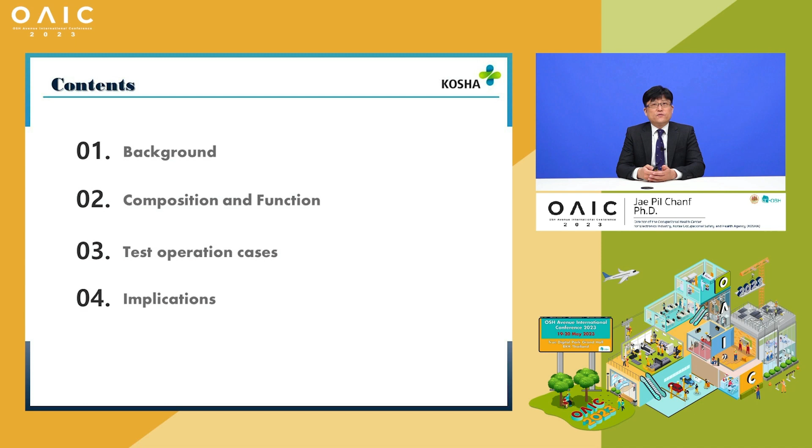Though we still have a long way to go, I'm going to share with you the constant chemicals monitoring system. This system has been under development since 2020 and is now in test operation. The order of presentation is as follows: background, composition and function, test operation cases, and implications.

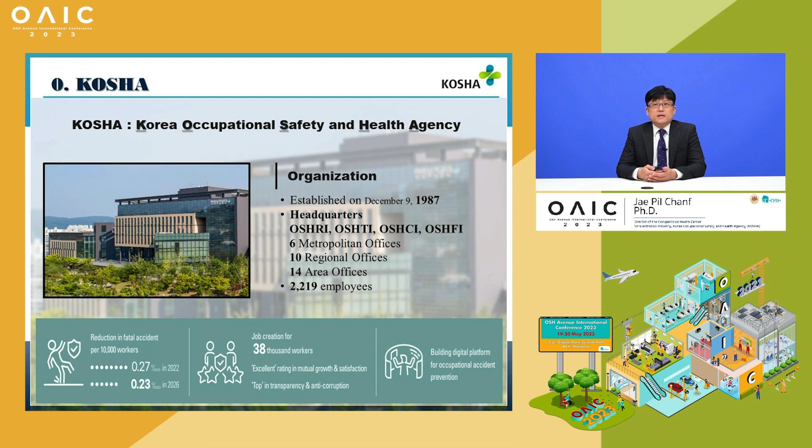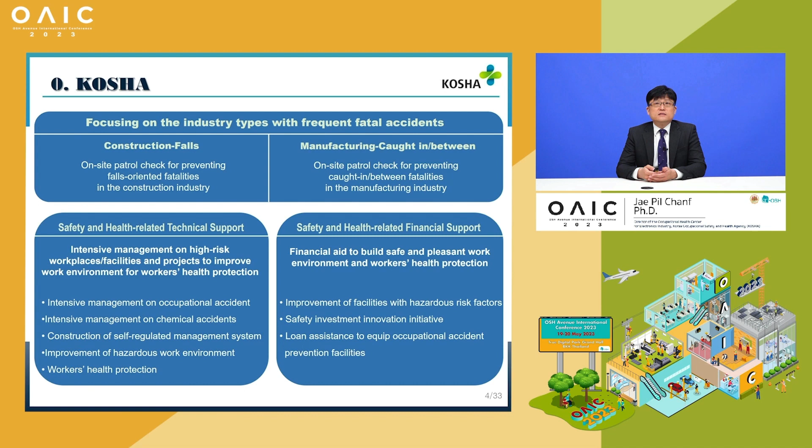Before I move on to the main discussion, I'd like to briefly introduce KOSHA. KOSHA means Korea Occupational Safety and Health Agency. KOSHA was established in 1987 and is composed of headquarters, 4 institutes, and several area offices. We especially focus on the industry types with frequent fatal accidents, carrying out patrol inspections to prevent falls in construction and caught in or caught between injuries at manufacturing sites.

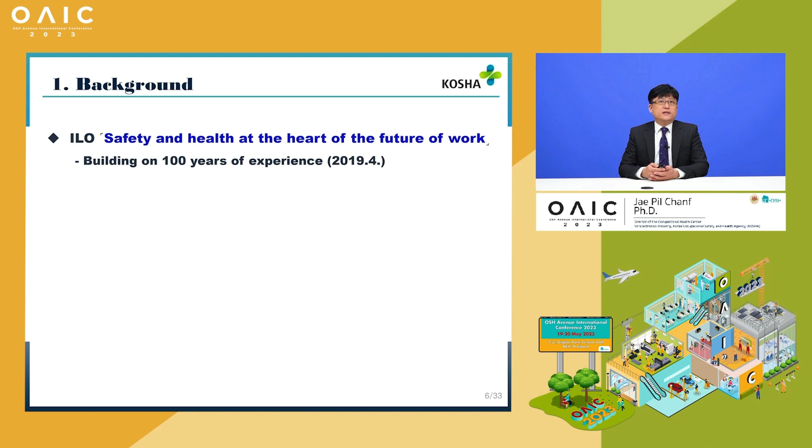Now, let me begin with the background. The Safety and Health at the Heart of the Future of Work report, published in 2019 by ILO, discusses technology, demographics, sustainable development, and changes in work organization. These changes are seen as the future challenges and opportunities of OSH.

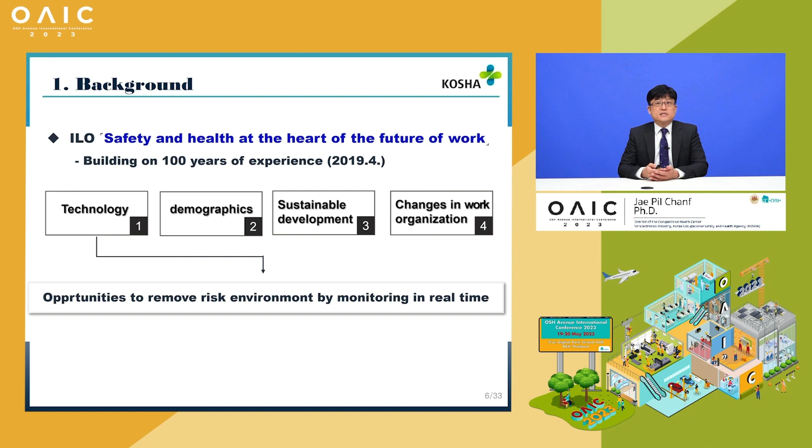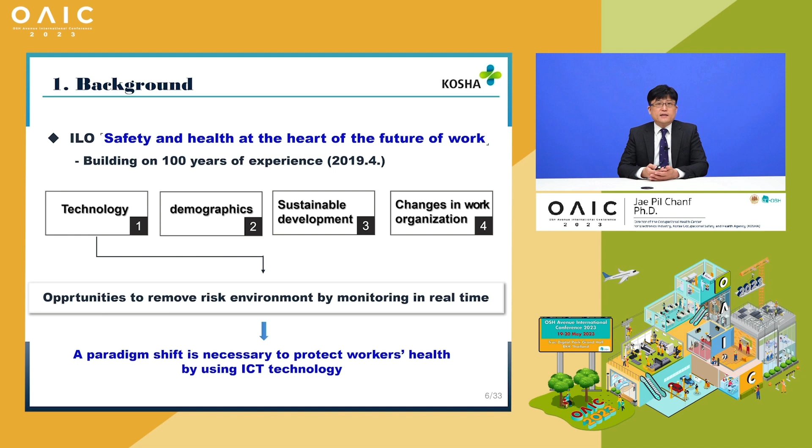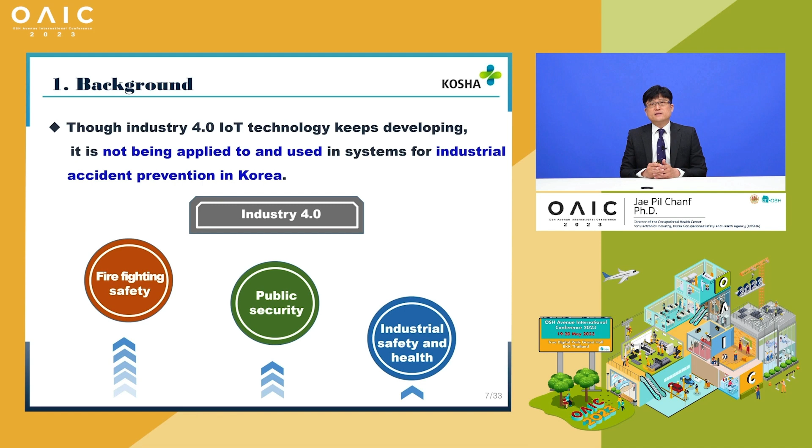The report says digitalization and ICT technology development can provide opportunities to remove risk environments by monitoring exposure to risk in real time. Therefore, a paradigm shift is necessary to protect workers' health by using ICT technology. Though Industry 4.0 technology keeps developing, it is not being applied to systems for industrial accident prevention in Korea. While these technologies are being actively used in other areas of safety, such as firefighting safety and public security, OSH is applied with just conventional technical guidance and facility and equipment improvement.

As a result, cases of acute chemical poisoning are increasing in Korea. Most cases have occurred during non-routine work, temporary or short-time cleaning work. For example, there was a death caused by acute poisoning with dichloromethane last year. Also, a person died while cleaning inside a TCE washing tank in 2019.

Although Korea has devised a work environment measurement framework and provided technical guidance to prevent such acute poisoning accidents, these measures are not enough to prevent accidents caused by non-routine work. That is because the work environment is measured semi-annually, and the technical guidance is given just as a one-time visit for technical support. In addition, business owners have a complacent mindset that there is no problem as long as they comply with the basic law, and this results in a lack of motivation to improve the work environment.

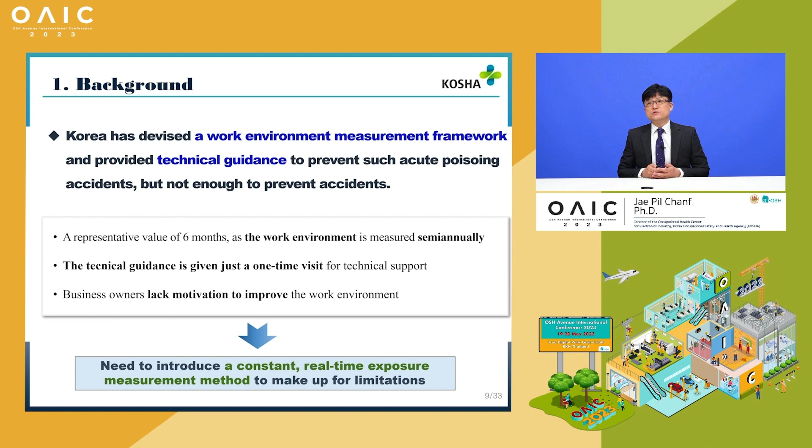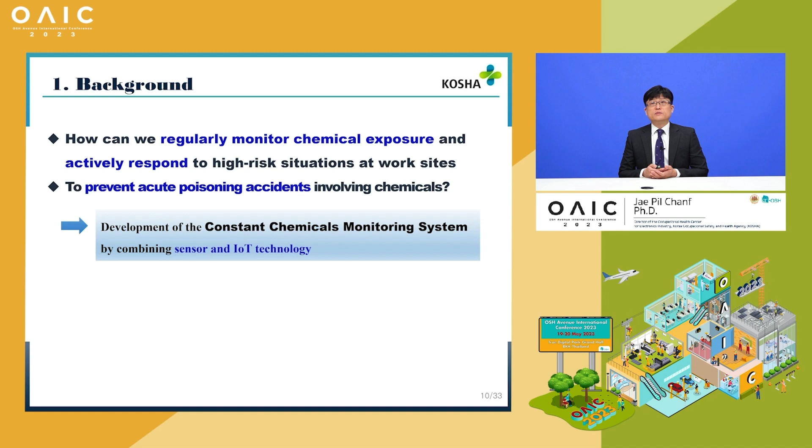So, I need to introduce a constant real-time exposure measurement method to make up for these limitations. How can you regularly monitor chemical exposure and actively respond to high-risk situations at work sites to prevent acute poisoning accidents involving chemicals? To make up for such limitations, we have developed the constant chemicals monitoring system with a combination of sensor and IoT technology.

The constant chemicals monitoring system is developed to regularly monitor the exposure concentration of chemicals by installing IoT-based remote sensors at business establishments that handle chemicals, enabling the businesses to control the work environment by itself by analyzing and using the data on the monitoring platform.

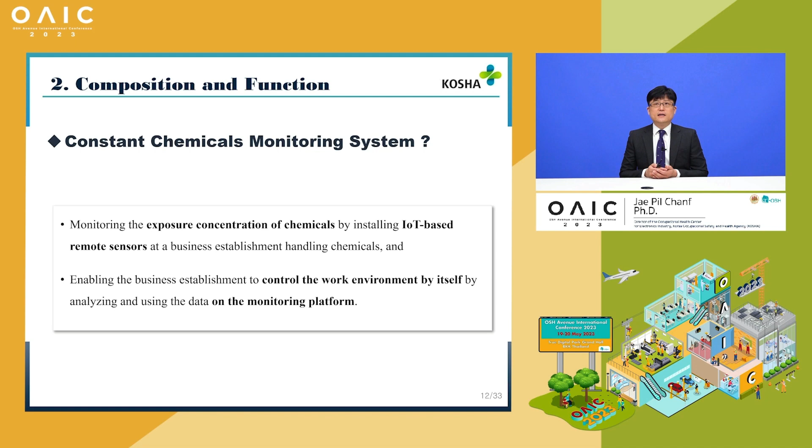I would like to show you an animation video to help you better understand the monitoring system. The slide shows the flow chart of the system. Step 1: with the sensors installed at the business sites, the measured data is transmitted to a monitoring platform where workers or managers can check the exposure concentration of chemicals in real time.

Step 2: when the exposure goes above a certain level, an alarm is triggered in the sensor and an SMS notification is sent to registered mobile phones. Step 3: with this system, businesses can check the performance of ventilators and improve the work environment to prevent occupational disease. Also, if a business submits an application to KOSHA, we provide support with consulting services and funds for work environment improvement.

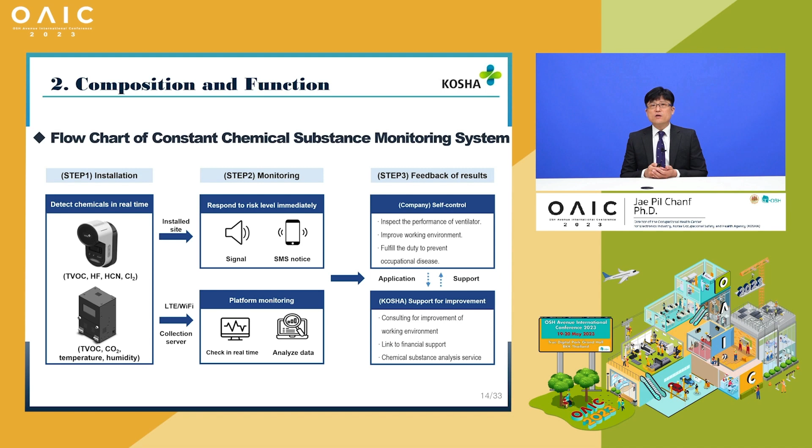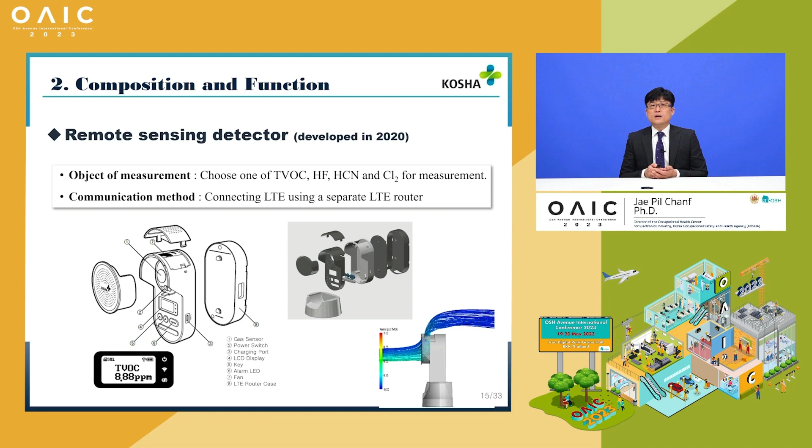The remote sensors were developed in 2020 to measure TVOC, hydrogen fluoride, hydrogen cyanide, and chlorine gas respectively. In other words, you can use a sensor with a TVOC detector if you want to measure TVOC. A separate LTE router is attached to the sensor for communication.

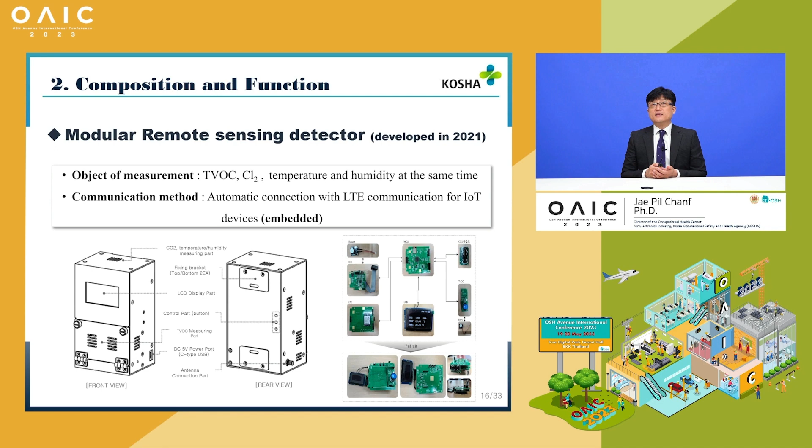The remote sensor developed in 2021 supplemented what fell short of the 2020 version. The new sensors are modular and can be attached to and detached from the device. This allows TVOC, carbon dioxide, temperature, and humidity to be measured at the same time. Communication parts were also upgraded with an LTE router embedded for automatic connection.

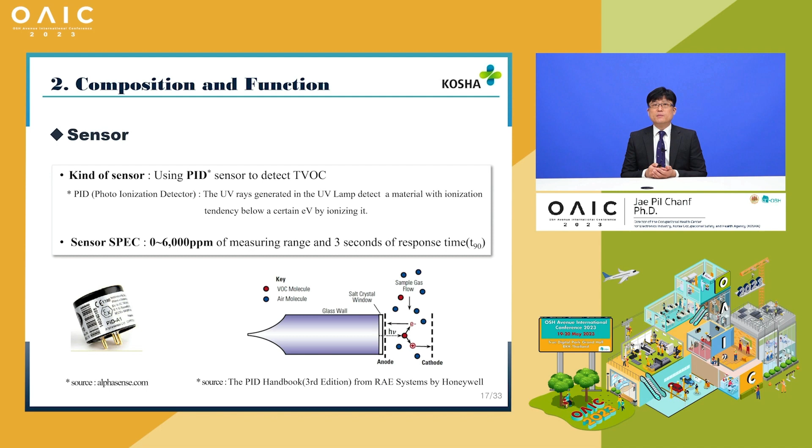A PID sensor is used for the device, as it was found to be the most appropriate to detect TVOC according to our research. The PID sensor uses the principle that UV rays generated in the UV lamp detect a material with an ionization tendency if it is below a certain electron volt. Its measuring range is 0 to 6,000 ppm and its response time is 3 seconds. The picture on the left is a PID sensor.

The concentration value of certain chemicals can be estimated by multiplying its response factor (RF), provided by the sensor manufacturer, and the TVOC value detected by the PID sensor. For instance, when calculating the exposure concentration of TCE, if the TVOC value detected by the sensor is 10 ppm, it is multiplied by 0.6, the TCE's RF, to estimate the TCE's exposure concentration to be 6 ppm.

The standard for the alerting signal was set on the basis of the ceiling value provided by ACGIH. If a chemical doesn't have a ceiling value, it is set on the basis of a value 5 times the TWA.

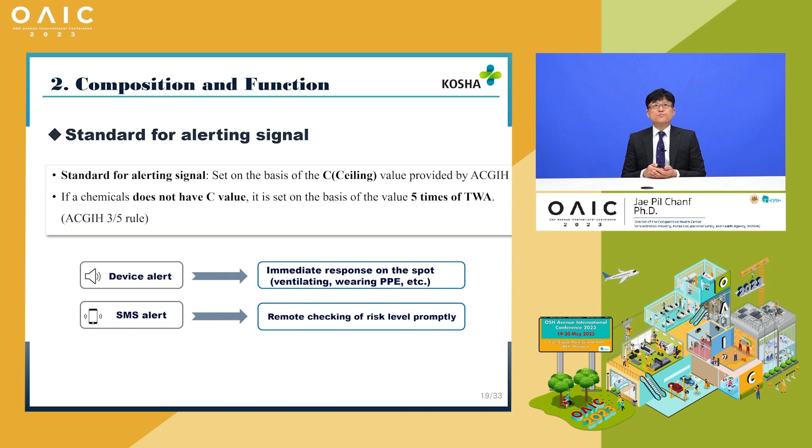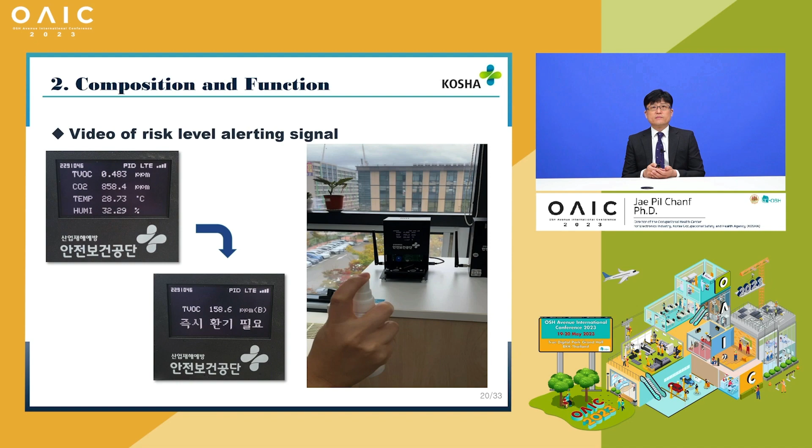When alert is triggered, immediate response such as ventilating or wearing PPE can be made on the ground. A user who received an SMS notification can promptly check the risk level in a remote environment. This video shows how an alert is triggered when chemicals in the atmosphere are above a certain level. When the alarm rings, an immediate ventilation necessary message pops up on the LCD screen. Let's watch the video.

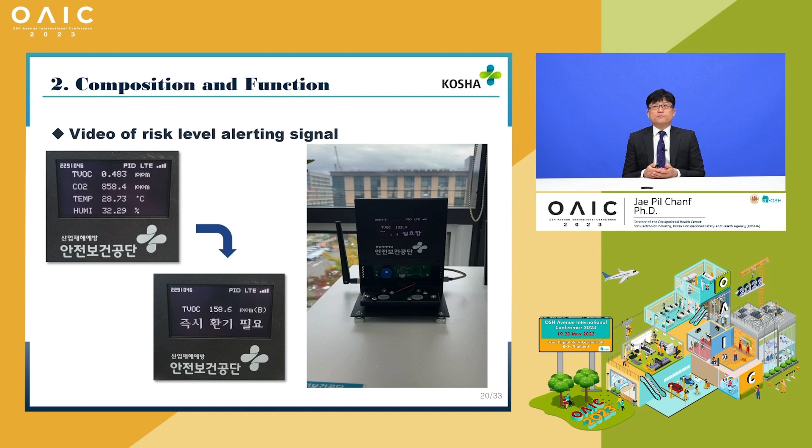For your information, the chemical spray in the video is hand sanitizer.

The exposure concentration of chemicals detected by a remote sensor can be checked on the connected platform. The data can be seen both on a PC and a mobile phone. The data can be used for self-safety management of business establishments. Below are screenshots of our platform in operation.

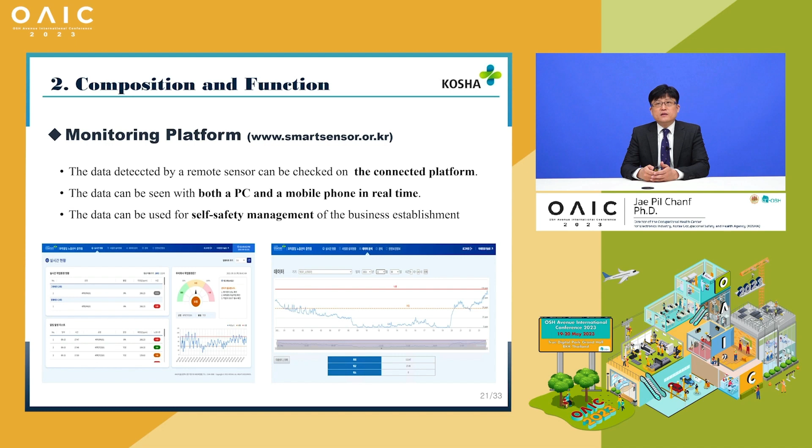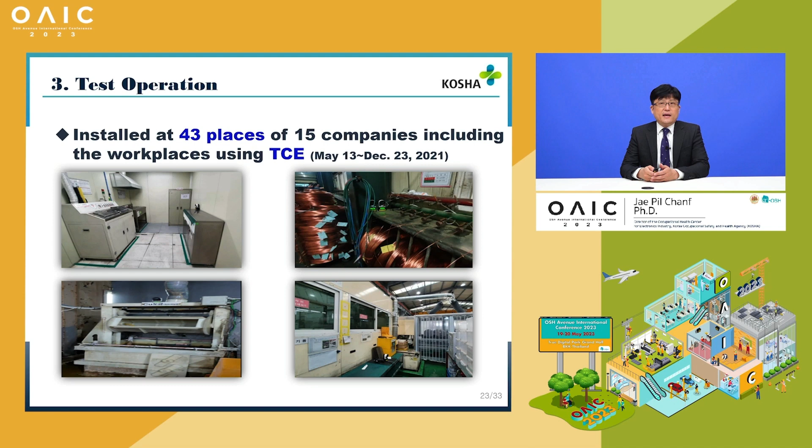Let me share some test operation cases. The constant chemicals monitoring system was installed at business establishments that handle TCE for test operations between May and December 2021. In establishment A, where a local exhaust ventilation system is normally operating, the daily maximum and average exposure concentrations are below the alert level.

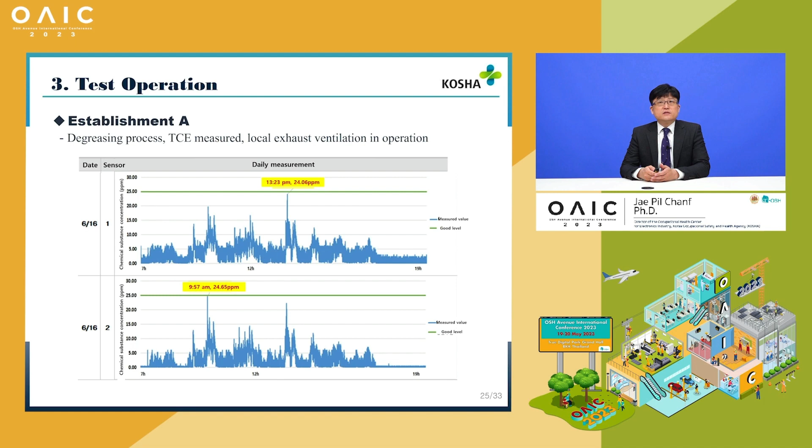If we look at the real-time data over the day with the highest maximum exposure, the value was temporarily high during the time when chemicals were used.

In establishment B, where a local exhaust ventilation system is automatically turned on only during working hours, the daily maximum and average exposure concentrations are above the alert level.

But it is ironic if we see the data of the day with the highest maximum exposure. The establishment uses a system where TCE is automatically injected to wash the pipes 24/7. As soon as the ventilation system stops working around 8 p.m., the TCE concentration rapidly increased and was maintained in the washing room. And it dramatically dropped when the ventilation fan was turned on around 7 a.m.

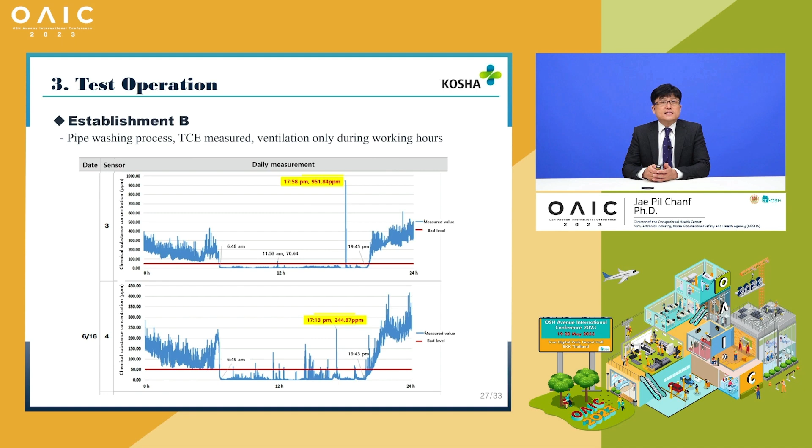Such a trend was recognized throughout the establishment with the installation of sensors. We instructed them to prohibit entrance to the site unless it is ventilated. If necessary, enter the site only after turning on the ventilator from the outside.

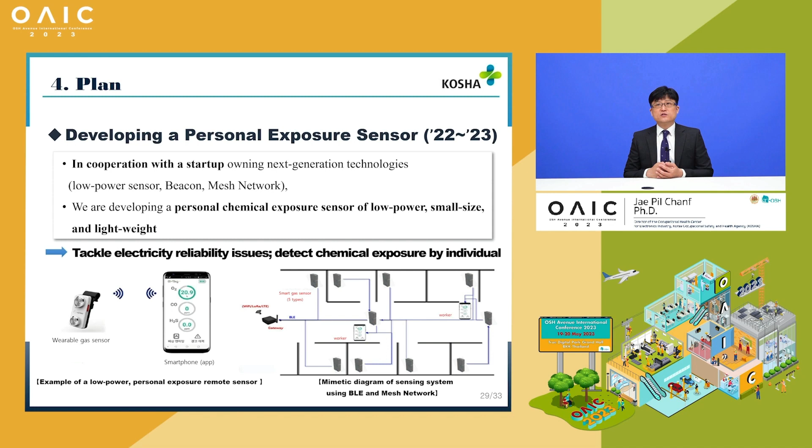Lastly, I would like to talk about the plans and implications of the chemicals monitoring system. We started the development of a low power and small size personal exposure sensor in cooperation with a startup. If successful, the sensor will run wirelessly for more than a year, have no restriction for installation, and enable the detection of exposure concentration of chemicals for each individual.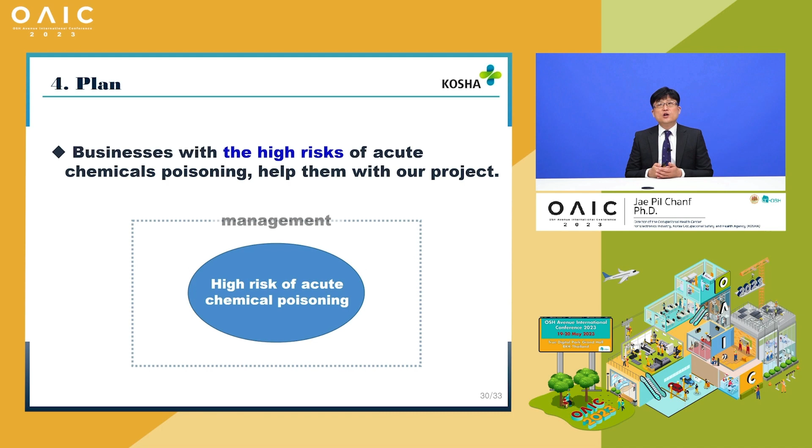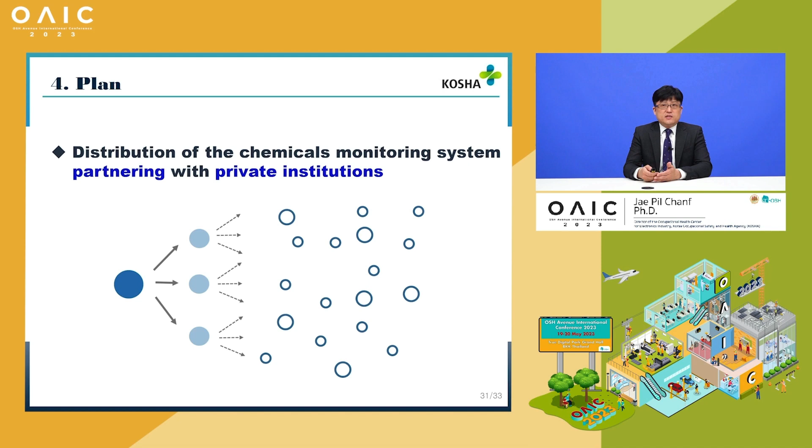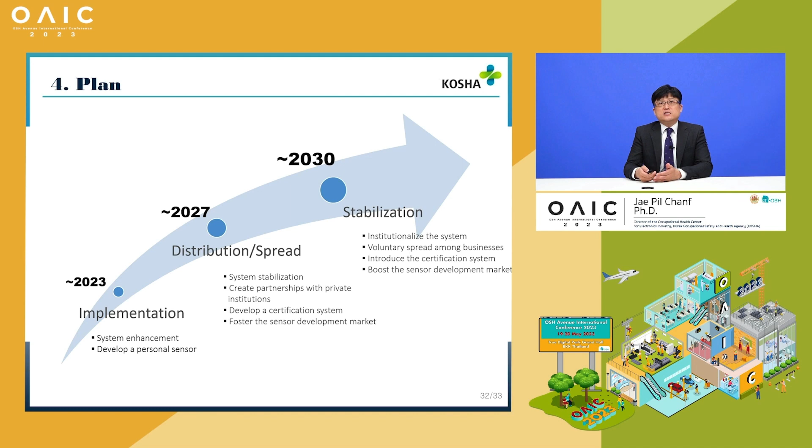For businesses with a high risk of acute chemical poisoning, such as those using cleaning chemicals, we will help them in connection with our project. Furthermore, we will partner with private institutions to distribute the constant chemicals monitoring system to small and medium-sized businesses. In the mid and long term, we will stabilize the system by 2027 and institutionalize it by 2030 to encourage its distribution among business establishments.

I believe the constant chemicals monitoring system will be an opportunity to shift the paradigm of exposure measurement for occupational health. According to the law, work environment measurement is conducted twice a year, and this measurement estimates the exposure by the value detected on the day of measurement.

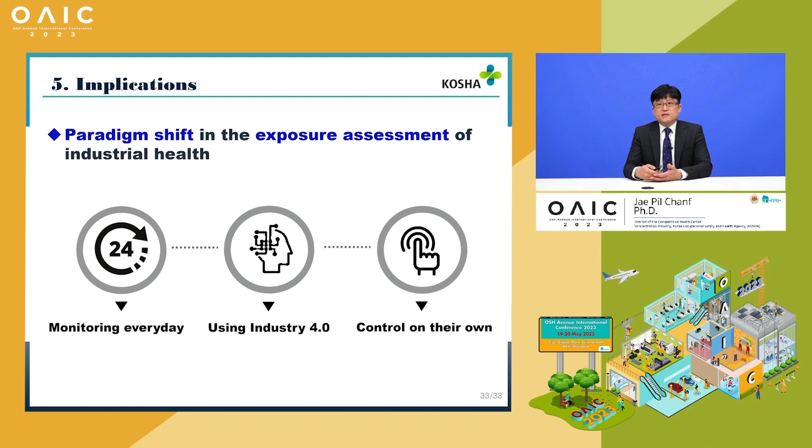In contrast, our monitoring system always monitors chemical exposure, which makes the system more meaningful. Moreover, it presents a new direction for chemicals management, where the exposure level is monitored remotely and regularly using Industry 4.0 technologies such as sensors and IoT. This will allow businesses to establish a system that can control the exposure concentration of chemicals on their own.